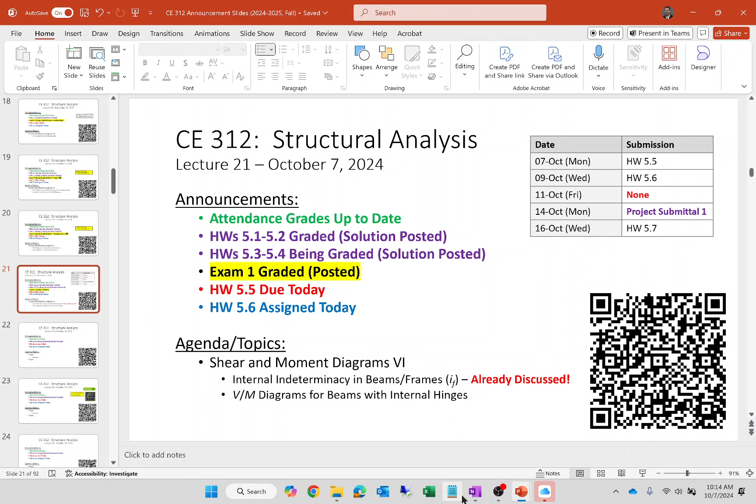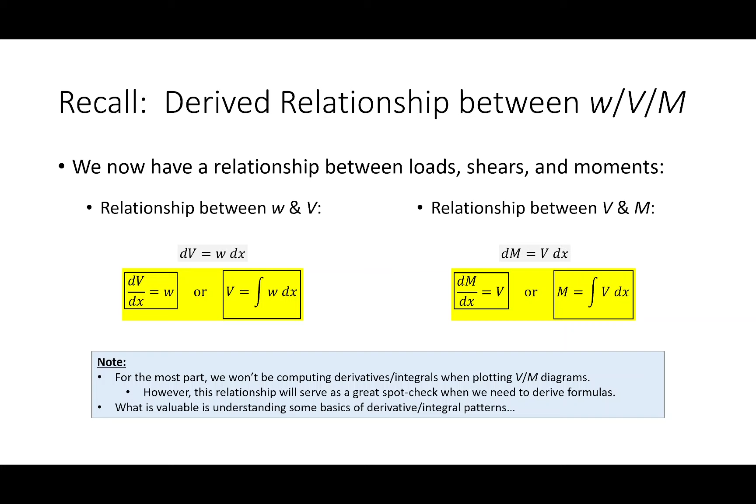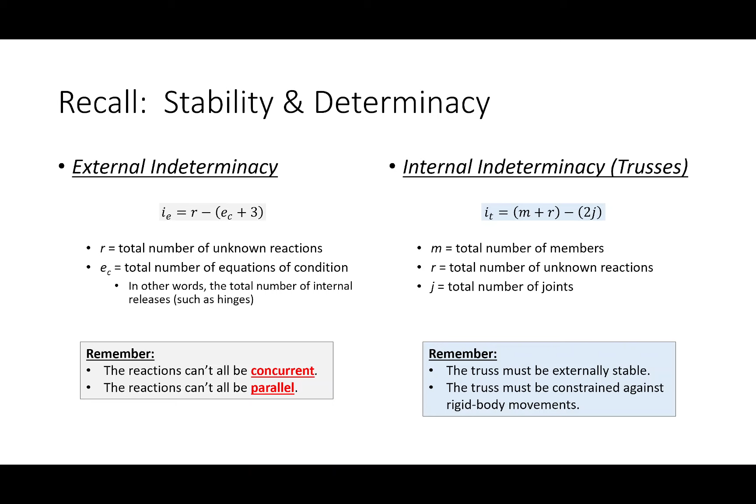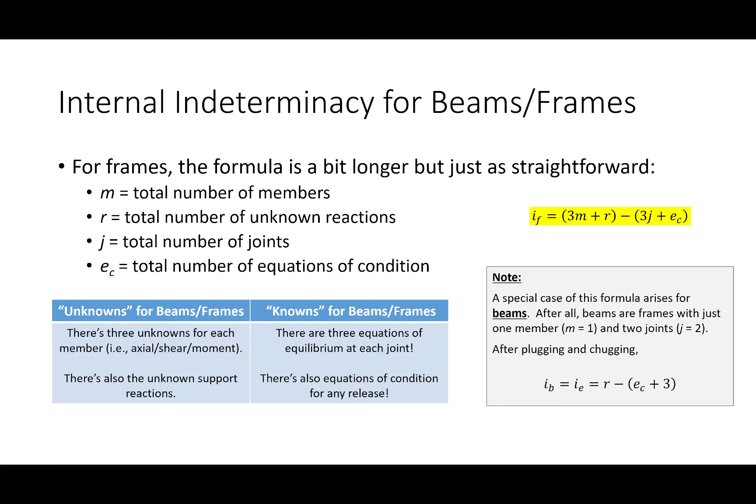I am going to skip through this first part of the slideshow because we already talked about this, how to compute internal indeterminacy for beams and frames. This is what we talked about on Friday, about external and internal indeterminacy for trusses. For beams and frames, the formula is a little more involved, but not really difficult. It's more involved because frame or beam type flexural elements have more going on, they can have axial, shear, and moment responses. So there's 3 unknowns for every member, and 1 unknown for every support reaction. So the unknowns are 3m plus r, and the known quantities are 3j plus EC. EC is for if you ever have an internal hinge, which we're going to have today. And 3J is because every joint has to satisfy 3 equations of equilibrium now, not just 2. Again, I'm going through this part fast because we talked about it on Friday. Any questions about this? Hopefully it's pretty plug and chug.

All right, this is really what I want to talk about today, shear and moment diagrams for beams with internal hinges, and I want to make this point crystal clear. The question is, how does the presence of an internal hinge affect your construction of a shear diagram or a moment diagram? The answer is, it doesn't. So when you are constructing the shear diagram or moment diagram, just ignore it. It doesn't matter. I'm saying this because I guarantee you, if we have an exam problem with a beam with an internal hinge, there's going to be students that try to assign some reaction to it or figure out some force. No, it doesn't affect the construction of the shear and moment diagram at all.

So what does it impact, what's the point? Well let's talk about a moment release, an internal hinge. When you provide an internal hinge into a beam, you provide an equation of condition. We use the fact that the sum of the moments are 0 at that hinge in order to solve for reactions. So those reactions that we get when we analyze the structure are the reactions necessary to satisfy not only the equations of equilibrium for the whole structure, but also the equation of condition at the hinge.

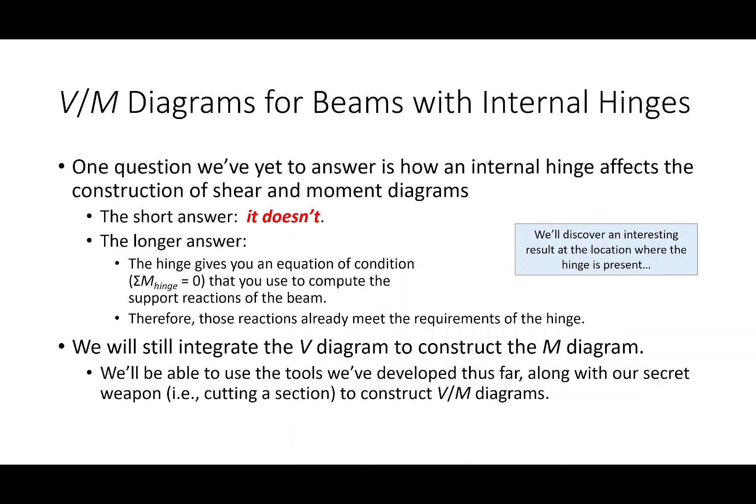Sound good? Everybody good? Now, like I said, we're going to do a start to finish problem here, so I'm not giving you the reactions like I have on some of my other examples. We're going to do a start to finish shear and moment diagram problem. I say compute the support reactions, and construct VM diagrams.

For this beam, remind me, how many unknown support reactions are we going to have for this problem? Four, because we have three here at the fixed support and one at the roller, okay? So we're not going to be able to apply solely equations of equilibrium, because equilibrium gives us only three equations. We're going to need to use something else.

So what secret weapon of structural engineering are we going to need to break out to solve for this additional reaction? We're going to have to cut a section, right? We'll have to break out the samurai sword, or lightsaber if we're sci-fi fans. And where are we going to cut a section? Through the hinge, right? Okay, so let's break out the notebook.

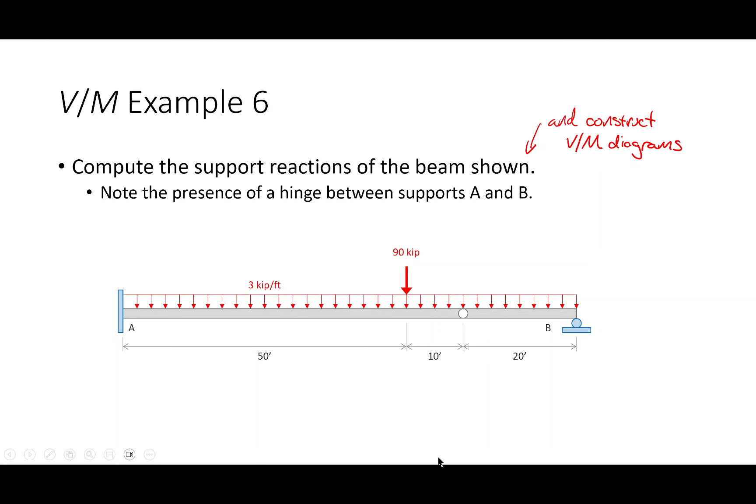Let's see what we got. All right. Okay. All righty. Okay. So, oh, it would help if I had my little handy dandy notebook right here. The notebook with all the answers.

So if we start identifying our unknown reactions, okay? We know we're going to have a reaction here, we'll call that BY. And we know we're going to have a vertical reaction here, AY. Okay? We know we're going to have a potential horizontal AX, and we're going to have... I'm drawing some pretty rough looking arrow tips right there. Call that MA. So those are our four unknown reactions.

Now one of them we should be able to knock out pretty easily, right? Which one is that? AX. Because are there any horizontal forces anywhere on this beam? No. So what is AX? Zero. Okay, so we'll just put this up here: AX equals 0. Okay, so we got one of our reactions.

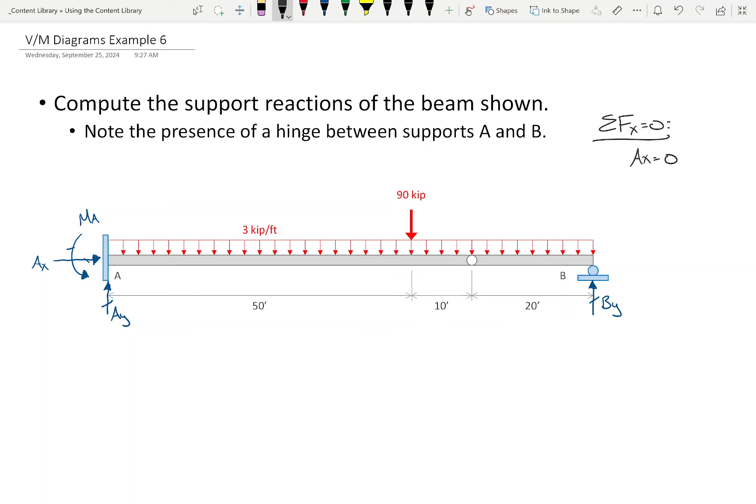Okay, so if I sum moments about A, kind of roughly here. Am I going to have to consider AX? Am I going to have to consider AY? Am I going to have to consider this? So that's one unknown, right? Am I going to have to consider this? So if I do that, which I am going to have to do, but if I do it now, I'm going to have an equation with two unknowns. So it's not going to directly yield, like BY equals 4 or MA equals 6. I'm going to have an equation with two unknowns.

So I guess my question is, I am going to have to do it, but is there something else I can do now to make life a little easier? Section at the hinge and then look right. Okay, all right, so let's cut a section at the hinge, okay? So let's cut a section at the hinge.

All right, so we are going to have to sum moments today, we will, we'll just do it a little later, okay? So I'm going to cut a section at the hinge. Now, why look right? Easier, there's just less going on, right? And just make my life a little easier. So we're going to break out the samurai sword or lightsaber, and we're literally splitting this structure into two pieces, and I am only going to consider the piece on the right, okay.

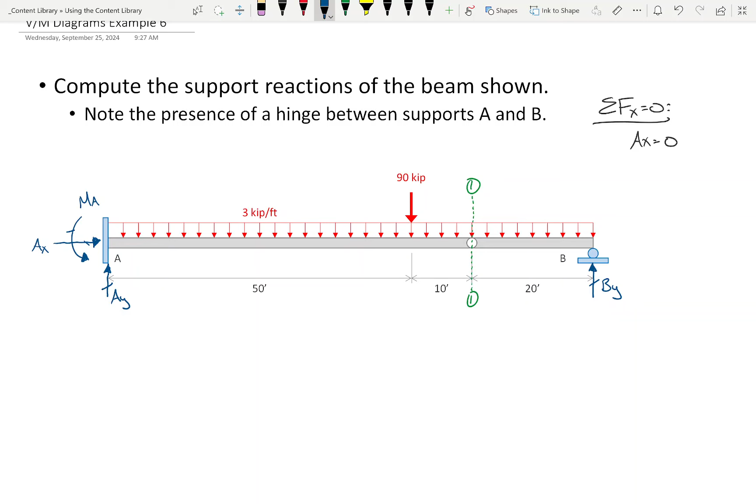So we'll say, okay, we'll consider section 1-1, looking to the right. Okay, tablet's getting a little toasty. All right, so...

If I'm cutting a section right here, I've got the roller reaction right here, and then the only load I see is the distributed load. So the distributed load is going to look something about like this.

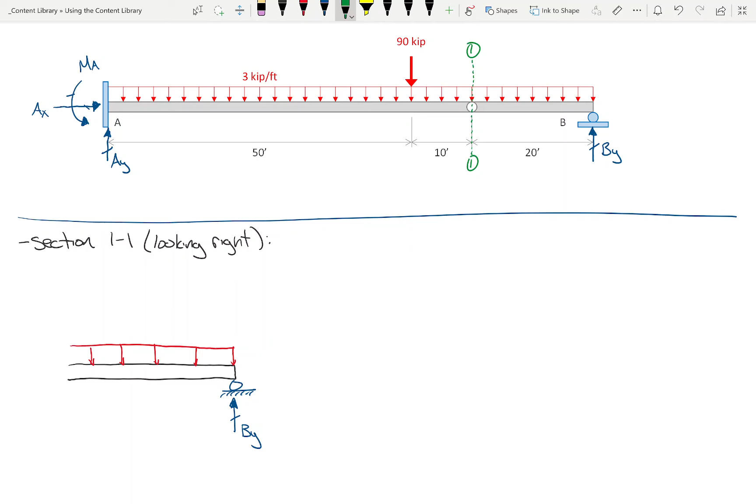And then here is that. Okay.

So at this hinge, I'm going to have a shear. Which way do I draw a positive shear, by the way? If I cut a section and look to the right, which way is positive shear? Up. You got to love the long protracted answer. Yeah, up. I meant up.

We're going to have an axial force. Are we going to have a moment right there? No. Why don't we have a moment? Because we're cutting the section through a hinge. That's the whole point of a hinge, is that there is no rotational moment there at the hinge.

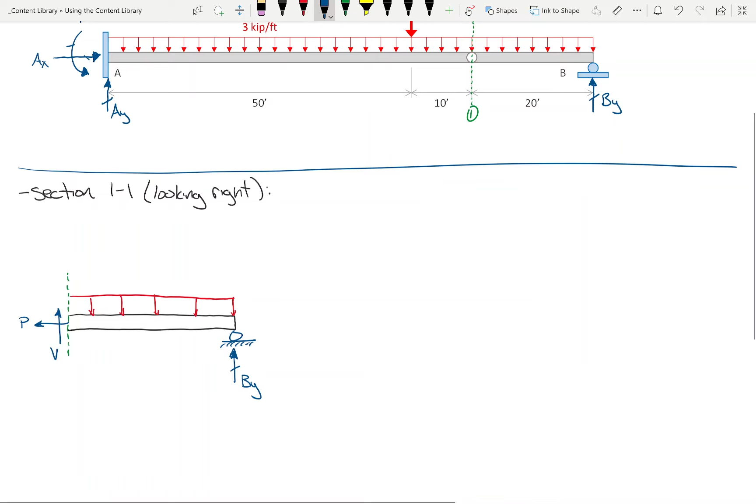Okay, now what is the length of this segment, by the way? 20. Okay. And then this is 3 kips per foot. So what do I do with that 3 kips per foot? Collapse it into a point load, and that's going to be 60 kips where? 10 feet. 10 feet from the section cut, or 10 feet from the right, doesn't matter.

So we're going to turn that into 60 kips, 10 feet. Okay.

So tell me what to do. I have 2 unknowns here, 1 unknown here. Do I really care about these unknowns? Not really. You're going to see something here in a second, but I don't really care about them right now. Okay, so tell me what to do. Sum the moments about the cut. Sum moments about the cut, looking right, yeah. So we'll sum moments about the cut.

Okay, and this should be pretty easy, right? Because I'm going to have what? 60 times 10 going like that, and then something times 20 going like that. By the way, what is that something going to be? 30. Yeah, that should be pretty easy to do in your head, right? So, 60 kips, 10 feet. We'll call it BY.

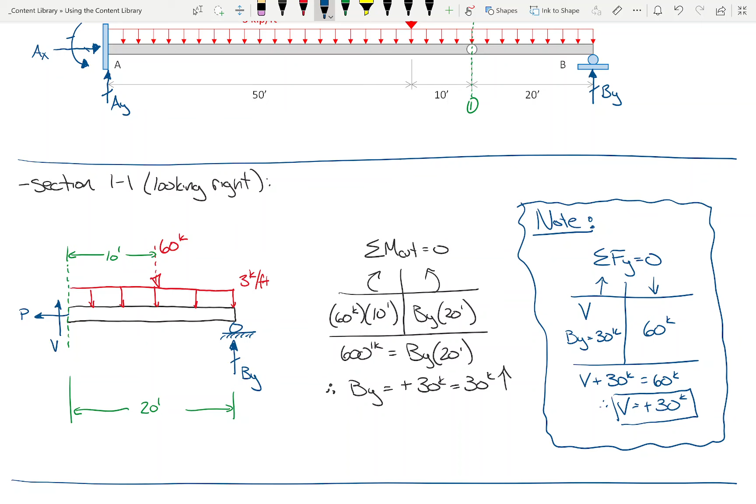V is plus 30. And by the way, what's M? 0. Okay, okay. So let's just keep that in the back of our head. Let's just see if that becomes relevant a little later. Okay, so far so good?

Okay, now back to the original structure. Okay, so let's just go back to the original structure. We know that this is 30 kips, and we know that AX is 0.

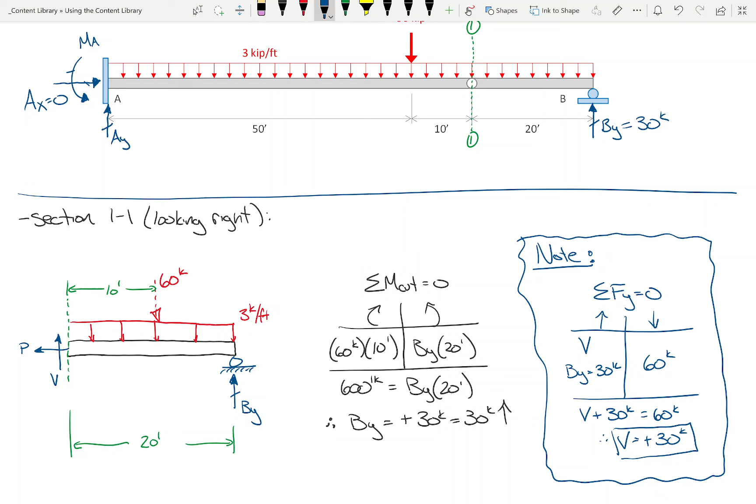So everybody's right, we have to sum moments at A, but we're also going to have to sum forces in the Y direction, right? We're going to have to do that. So it's not really going to matter which one we do first, but I think what I'm going to do is do it on the board to sort of prevent the scrolling, and then I'll transpose it to the notebook here in a second. So we're going to have to sum forces in the Y direction first, or we're going to have to do this, and then sum moments at A.

I think it was Mr. Hartwell said let's sum moments at A, so let's do that one first. Doesn't really matter, but we'll do this one first.

So if we sum moments at A, do I need to consider AX or AY? No. Do I need to consider MA? Yes, and that's going to be on that side, right? Do I need to consider the 90 kips? Does it generate moment at A? Which side of the table does it belong, left or right? And what's the moment arm?

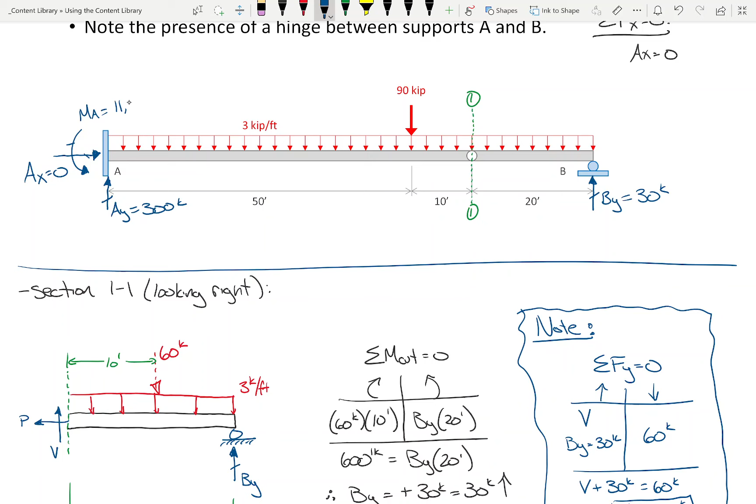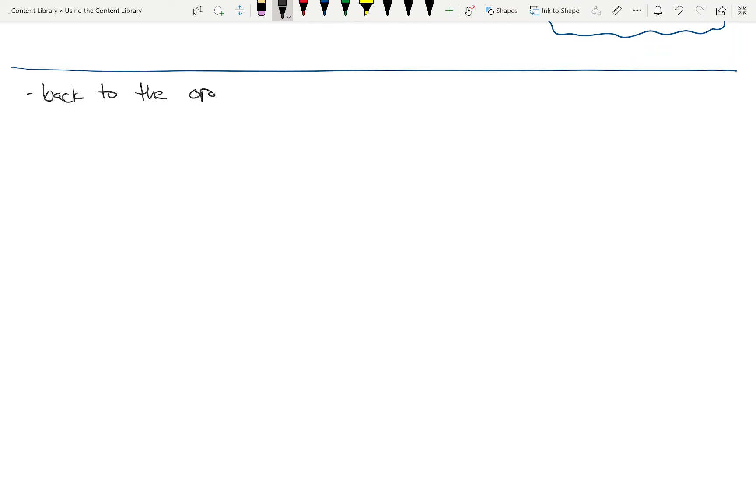So far, so good? Okay, so while you all are jotting that down, I'm just going to really quickly put that in the notebook so we all have it. I'll be quick about it. I'll be quick if I can write.

Sorry. I didn't want to do too much scrolling. All right.

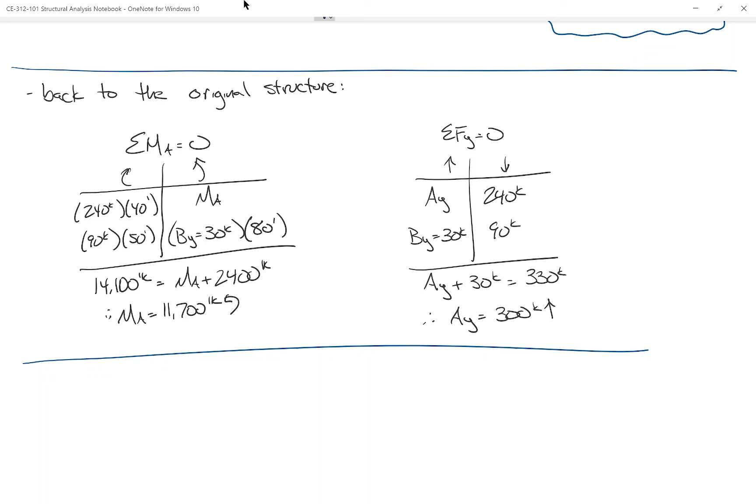Okay, all right, so everybody okay with this? All right, so one thing I'm going to do because I am lazy is let me see if everything's going to cooperate with me.

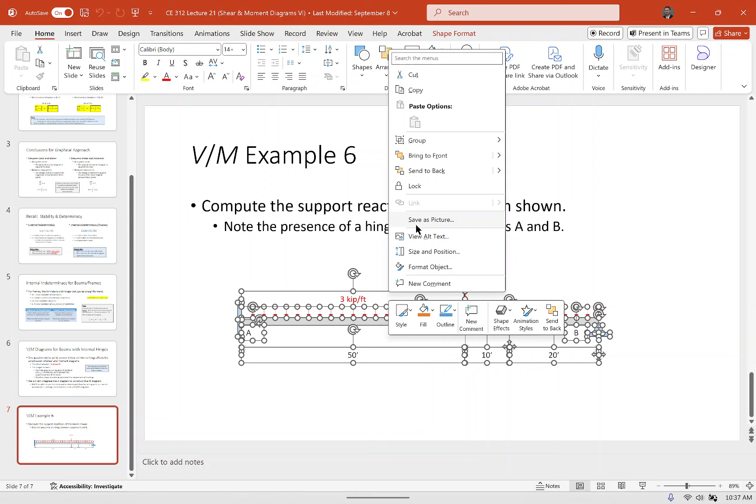Is I'm going to, for the purposes of constructing the shear and moment diagram, all right, I guess I'll just redraw it. I am going to redraw the beam again because I want to be able to put the shear and moment diagram right under it. So let's see if I can do that.

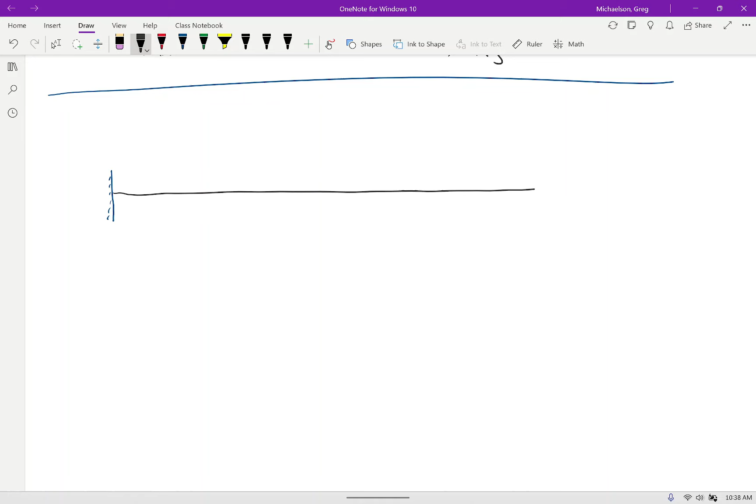Okay, now there is a hinge in the beam, okay, so I think the hinge is going to be, I don't know, about like this. That's about where the hinge is, right? 60 feet over from the left, or 20 feet over from the right.

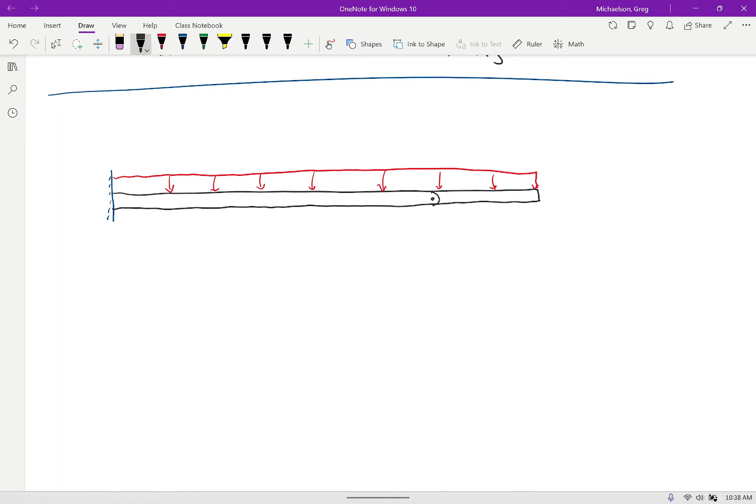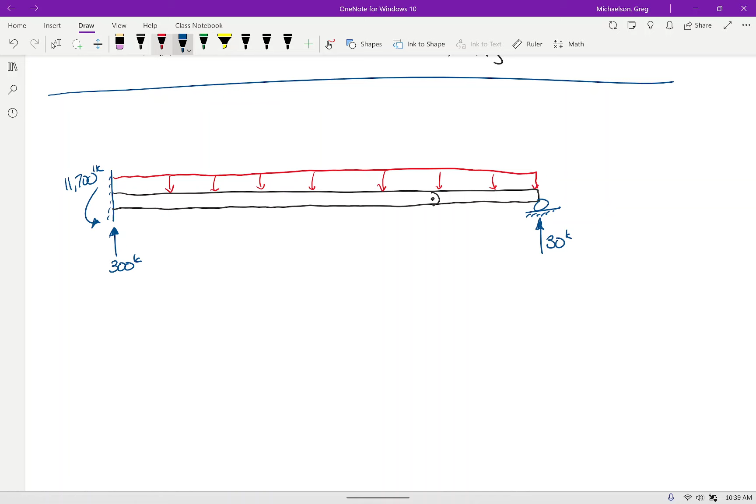So keep in mind, for the purposes of constructing the shear and moment diagram, we're going to ignore that. Okay, we got that this reaction here was 30 kips. We have a vertical reaction here of 300 kips. We have this of 11,700 foot kips. And then we've got, let's see, I think we have a load right there, which is 90 kips. This is 3 kips per foot. Am I right?

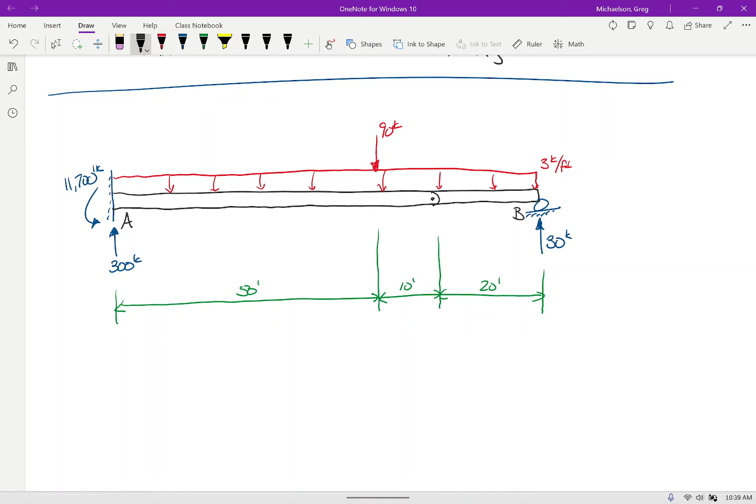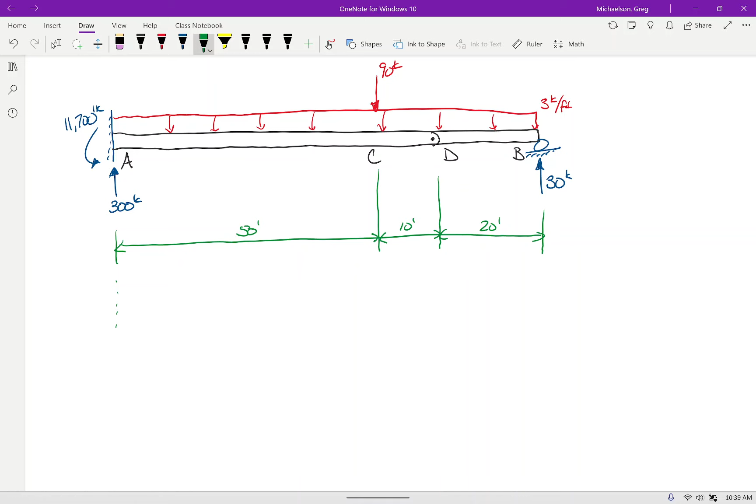And then for labeling, this was point A, this was point B. So I think I'm going to call this C and D, just for the purposes of our discussion, so that as we start talking about this, we all have the same vernacular. Okay, shear diagram. Let's see if we can knock this out. This is going to utilize all of our skills to date. Okay. I like that, there we go.

All right, so y'all know the drill, you tell me what to do. We're going to start at 0, but tell me what to do. Up 300, right? We pay attention to the vertical forces here. Okay, so we're at 300.

From A to C, what happens from A to C? Down 150. Okay, now how did you get 150? 3 times 50. Yeah, 3 kips per foot over a distance of 50 feet, so it's 150. So if I'm at 300 and I drop to 150, that's going to put me at 150 right here. So what does that path look like? What does it look like to go from 300 to 150? Negative slope, linear slope at a slope of negative 3, because that's the load.

Let me see if I can do better than that. I told y'all that having a straight edge would help, didn't I? See, there was a reason there. So what happens here at the 150? Goes down 90. Say it again. Goes down 90 to what? 60. So maybe about right there.

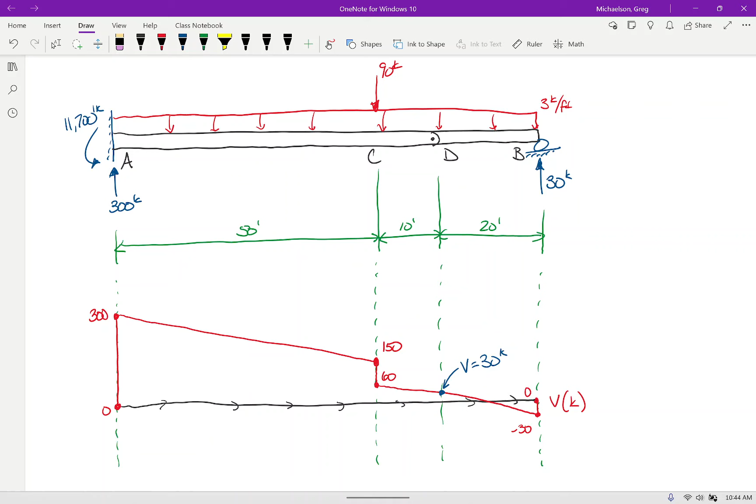Okay, now how are we going to draw the moment diagram? How are we going to do that? We got to integrate this, right? Okay.

Let's start off with this big region. Y'all remember how to get the area of this big region? Remember we take the average of these numbers, multiply it by the length. So what's the average of 300 and 150? What's that, 225? 225 times 50 is what?

Right? So over here, this is 20 feet, right? So that means this is 10 and 10. I know we're starting to get short on time, so.

So that means this area of this little region right here is 1/2 times 30 times 10. So that's going to be what, minus 150? This little region right here is going to be plus 150. And then this little shaded region right there is going to be the average of 60 and 30, which is 45 times 10, which is what, plus 450? Did I do that right?

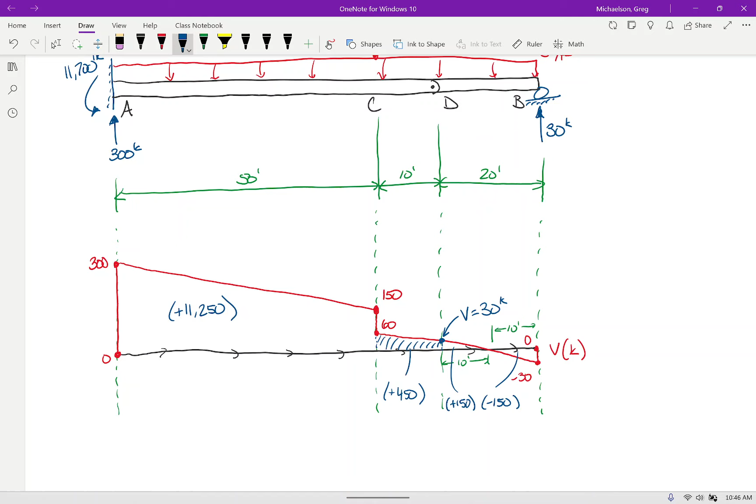11,700. Have we seen the number 11,700 at some point? That's the reaction right there, right? So that reaction, when we draw the moment diagram, is going to be a sudden jump downward, right?

I am going to draw a little additional line right here because that's where we got that 0 shear right there. And then these arrows that I'm drawing, which haven't meant much up until now, they're going to mean a lot on Wednesday. Here's our moment diagram.

So we're going to start at 0, suddenly drop down to negative 11,700. And I'm going to be a little off on my scale because if I were to draw this hyper accurately to scale, this would be really up here. So I'm probably going to drop this down a little bit just so we can see what's going on.

So if I'm at negative 11,700 and I jump up 11,250, that's going to put me at what? Negative 450? So what's that going to look like? Everybody watch up here. Is that going to be 1 or 2? 1. A lot to a little, right? So it's going to go something about like that.